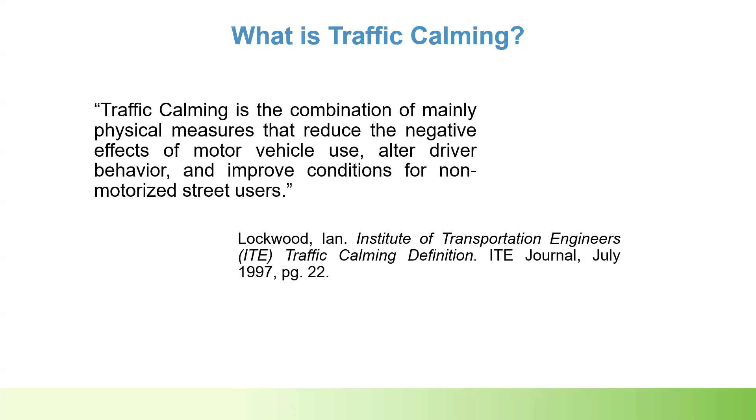So I'll briefly describe each step, but there's also a guidebook available online, and also a very tiny one that was mailed to project members. That will have more detail if you need to review anything after the meeting.

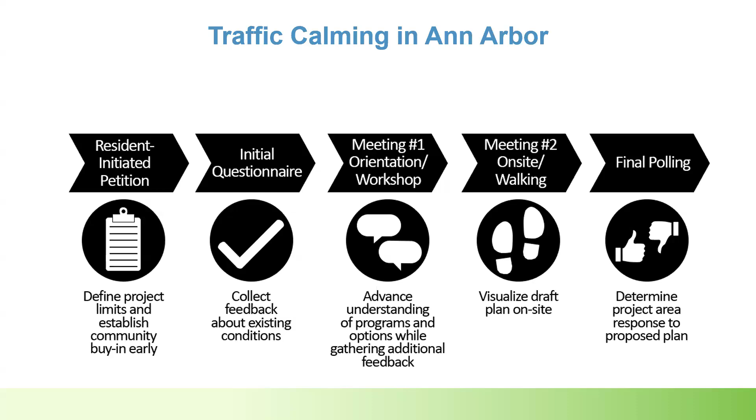So step 1 was the resident-initiated petition. The Carmel Street project started with one of your neighbors acting as the petitioner. They submitted a request to the traffic calming program for Carmel Street between Easy Street and Towner Boulevard. After this project area was defined, the petitioner gathered signatures from other residents who also live within that area. The requirement for the traffic calming program to accept that request is that at least 50% of the defined project area must support the project, and a preliminary technical study must result in at least 10 points. This project area collected signatures from 56% of addresses, and the preliminary study resulted in 16 points. There's a breakdown of those points on our project website.

But this allowed us to move on to step 2, the initial questionnaire. This came in the form of a mailing package. It had the questionnaire, with both an option to fill out and mail in or to complete online through our SurveyMonkey. This was sent to all of the project area residents to gather feedback on your experience with traffic calming, whether positive or negative, any specific concerns you have with the street, and to get a good picture of how the neighborhood currently feels about safety in the area.

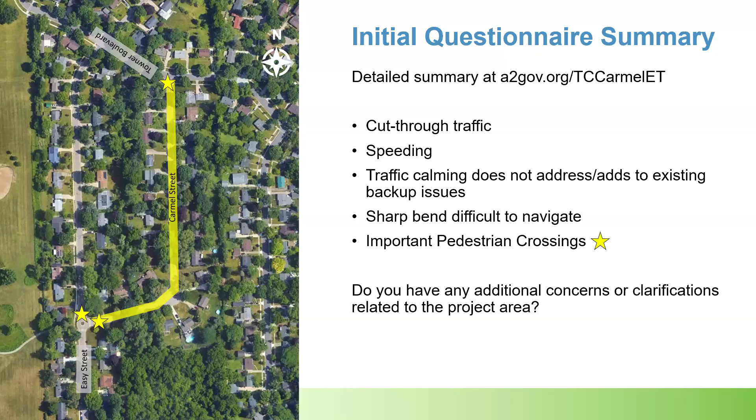So step 3 is where we are today. This is where our focus will be for the rest of the meeting. We have a starter idea that we've created, but before we do that, we'll just run through some of the devices that the program's guidebook allows us to use.

Before that, I'll do another poll, and ask - should pop up in a moment. This is asking if you're already familiar with the guidebook, if you might have gotten a chance to look at it. Take a moment to fill that out.

We're just short of full participation in the voting. I'll wait another moment in case anybody else wanted to do this one. We're kind of all over the place, which is perfectly fine. We've got some people who've already taken a look at it, maybe very briefly or just a while ago. Some people this guidebook is completely new to. That's perfectly fine, because either way, we're still going to go over it.

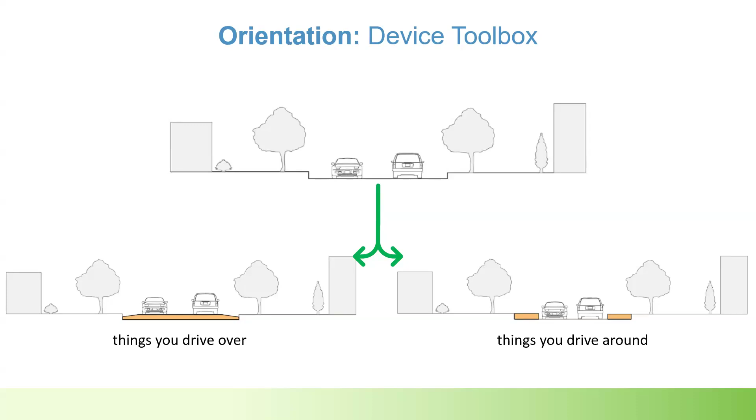So the category of things you drive over, in the guidebook, there are 4 devices. Things you drive over are devices intended to slow traffic by creating discomfort if traveled over at a speed exceeding 25 miles per hour. Again, this project applies to local streets, so the speed limit shouldn't be any greater than 25 miles an hour. So that's what these devices that you drive over are intended for.

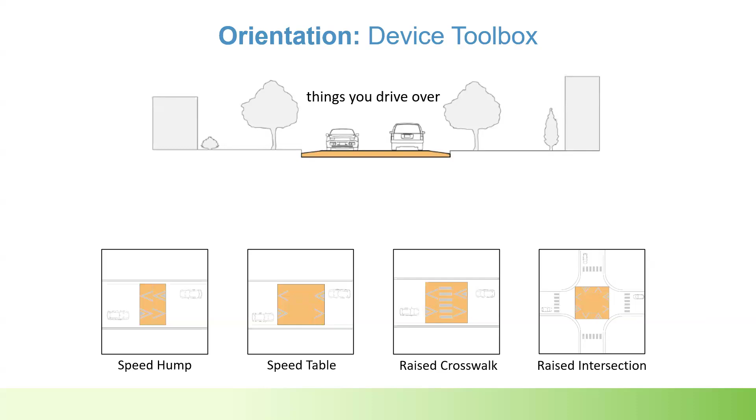We've got speed humps, speed tables, raised crosswalks, raised intersections. Right now, the city has put a pause on the raised crosswalks and raised intersections - both of these devices are under review by the department. Again, with the nature of this program intended to be budgeted for construction a lot faster than other larger projects the city does, they want to make sure there's a standard that can be followed so they don't run into issues with grading or ADA compliance. So they've put a pause on those right now. Doesn't mean they're completely off the table in the future, but for now, in terms of things you drive over, we're just looking at speed humps and speed tables.

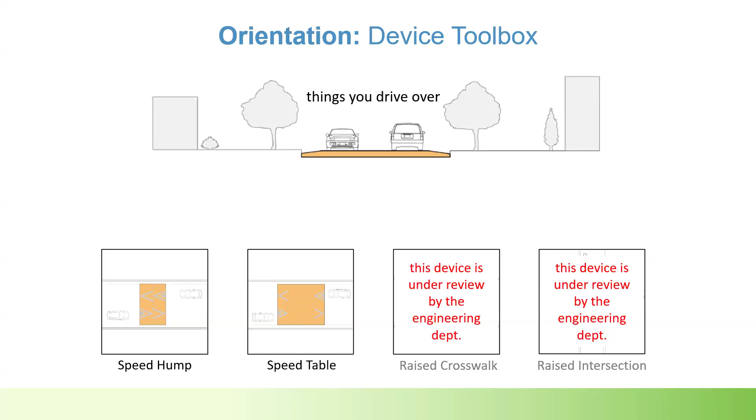Speed humps are typically 12 feet long. They're at their maximum 3 inches high, so they have a parabolic shape, and the maximum is at 3 inches. They extend the full width of the street, except for the gutter. If you look at the diagram on the left, the yellow is the speed hump, and it's just short of the gutter there.

When we look at the effectiveness of speed humps, there are studies that have found benefits may include speed reduction, traffic volume reduction, crash reduction. While we don't design or use traffic calming to deter traffic, volume reduction does end up being an outcome in a small way.

Other things to note regarding speed humps are that maximum height, that 3-inch height, was designed for ease of bike usage and bike safety. So it's still tall enough that a vehicle can feel it, but the design and the height isn't going to be something that should cause any discomfort or safety concern for bikes on the road.

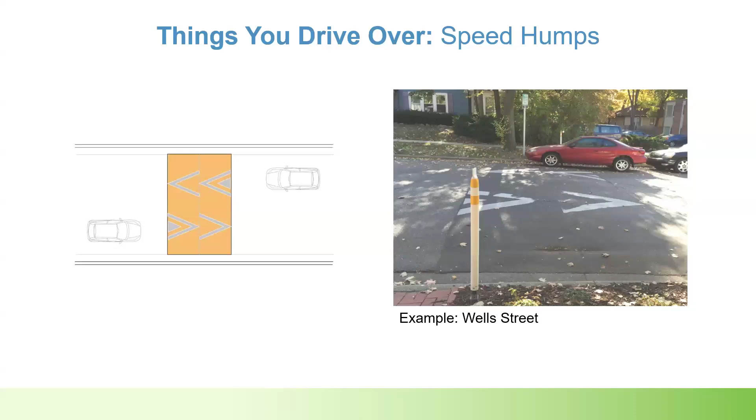There have been studies with speed table treatments. Traffic volume reduction and crash reduction are the most documented results from these. I will say the speed reduction is less than what you could expect with a speed hump. That platform width can be customized, and the same things apply as with the speed hump.

If parking is legal on the street, you can park on a speed table. You can place trash cans on the speed table if necessary. Bike usage and bike safety is in mind with the design, so there shouldn't be major issues with that.

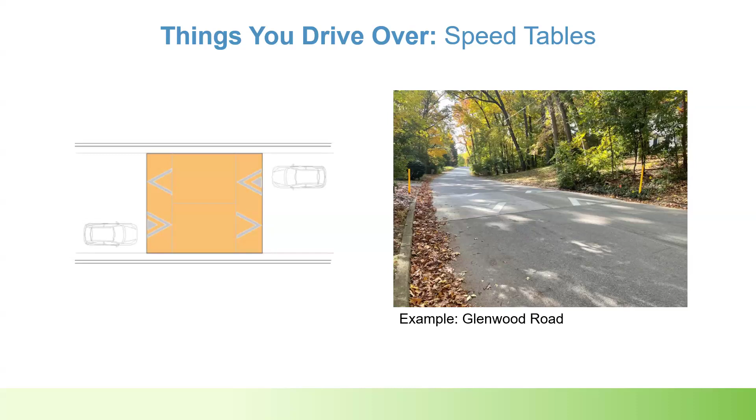So just those two devices are in the category of things you drive over. I'll do another pause if there's any question on the devices, anything you want me to go back on or clarify, I can do that.

I don't see anything, so I'll just keep moving forward.

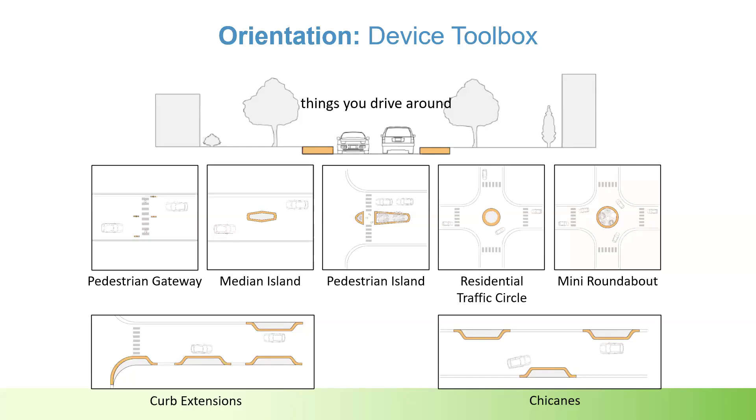The other category, other group of devices in our toolbox, are things you drive around. This type of device slows traffic by creating a perception of less room for error. It either visually or physically tightens the roadway, narrows it, and there are actually 7 devices within the toolbox under this category that the city has approved.

A good chunk of them are not applicable to this project. I will say a lot of these are due to width requirements—so for the fire department or emergency response to have the access they need on local streets, a lot of these devices don't meet the criteria.

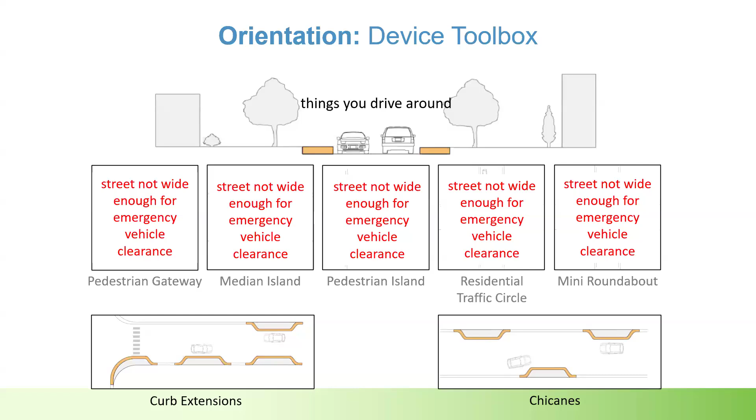So the next few slides are just going to be on the curb extension and how that's used.

Curb extensions can be used in several designs. You can do one at the corner for a bump out, or in the middle of your street as a mid-block bump out. You can put two across from each other, one on each side, and that's called a choker, which narrows the road, essentially a lane reduction.

So curb extensions are extensions of the curb line. They both physically and visually tighten the corridor by narrowing the street width.

The next slide will show a chicane, which is when you do alternating curb bump outs or mid-block bump outs.

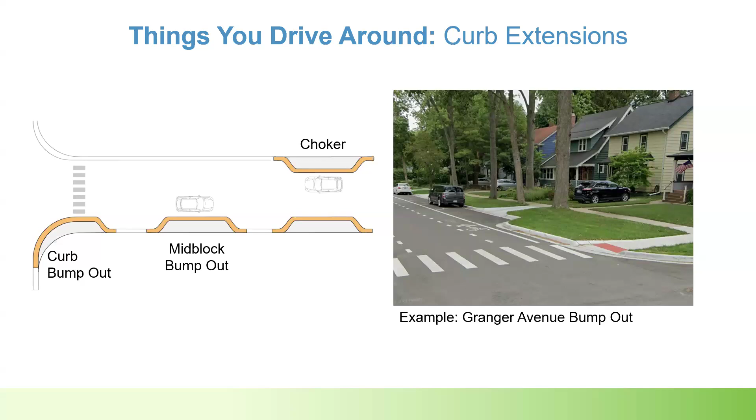This is that additional design with curb extensions where you alternate and stagger them to create a chicane effect. But the same considerations apply: drainage loss, loss of on-street parking, additional maintenance, and minimum width requirements.

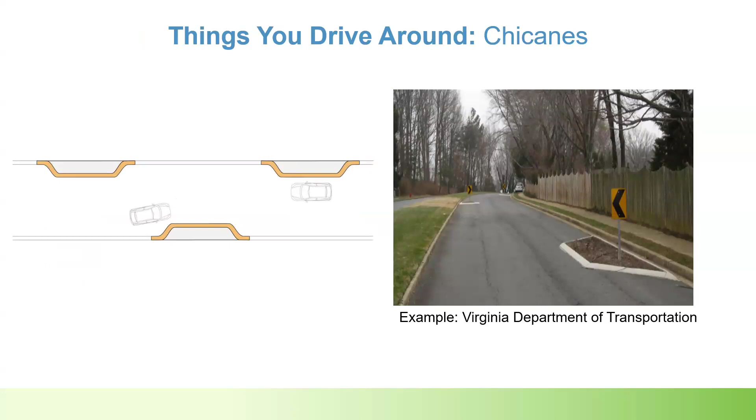Installation of this may require additional right-of-way. Additionally, the program has stated that the neighborhood or adjacent property owners would have to bear costs for landscaping, installation, and maintenance.

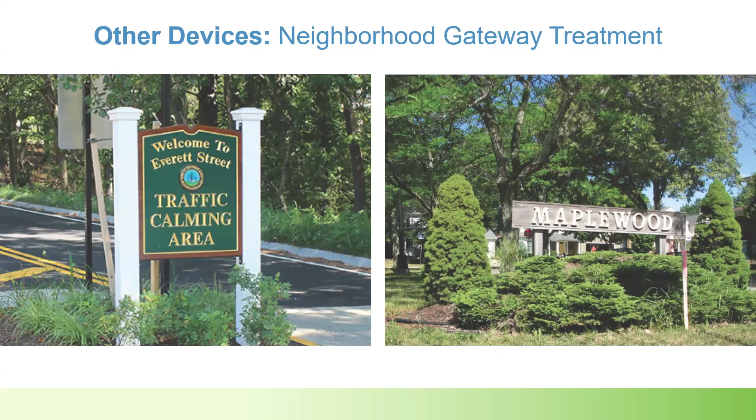So those are our devices. We're basically looking at three different things that we can implement right now that apply to Carmel. One of those, the curb extension, has a couple variations in how they're used.

I try not to go through these too fast, but I do try to get through it because I know a lot of people are here, and a lot of us just want to get into talking about Carmel Street specifically and the starter idea.

So I did get one question come in: what devices are being looked at for Carmel? Are bump outs being considered? I'll show it in a couple slides here, but bump outs did not make sense for our initial starter idea. So they're not off the table, but I can tell you they're not in the starter idea.

The follow-up question was, is there anything being considered for the curve? I'll show that when we get into the starter idea. With the curve specifically, we are restricted a little as to what this project can do, but I'll put a mental note to highlight the curve in a couple slides.

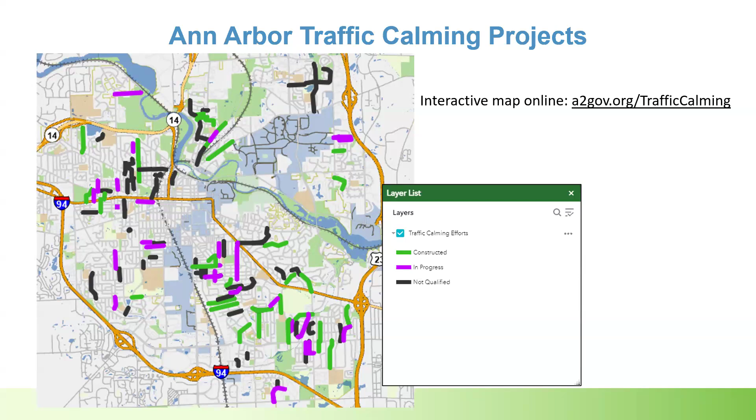So this is our next exercise, our next section where we get into the starter idea. This is a draft plan we've created, based on that preliminary data collection, that preliminary study done in the first step, the feedback from the questionnaire, and the context that the city and the petitioner provided. We'll have plenty of opportunity to answer questions on each of the devices and discuss any changes you may want to see, keeping in mind this project is limited to the devices we just reviewed, and there's additional engineering and design that needs to go into them before they're shared at our next meeting. But this is a starter idea, just our launch pad for conversation. This is not by any means the final design we'll see at the end of the public engagement.

We're proposing 3 speed humps throughout the street. To answer the question that popped up about how many feet apart multiple speed humps can be installed - this may be in the guidebook, but I skipped over it. Speed humps and speed tables are most effective when used in a series. A common comment is that they're not effective because people slow down to go over them but then speed right back up to get to the next one. So spacing plays a big role, and having them in a series assists with that. If we just had one speed hump, it would do nothing. The city has come to a consensus that they like to see them between 250 to 500 feet apart. Anything creeping into the 600 feet separation range would get into an area where you'd have to worry about its efficacy.

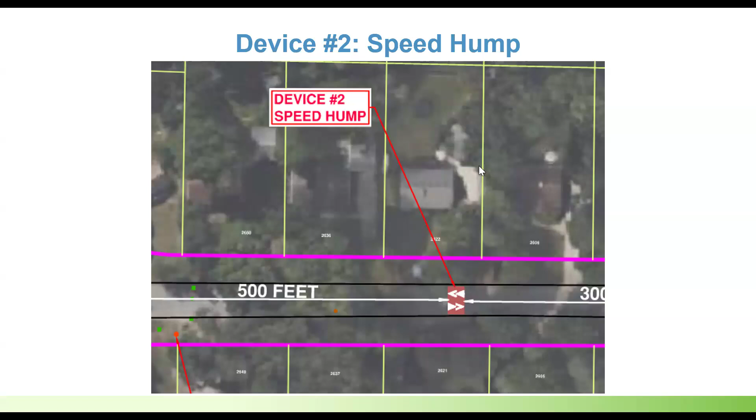Okay, let me go back. So you should be able to see the photos that I added on one of our previous slides. Let me get the little laser pointer thing too. The smaller photo here on the right is Carmel facing Easy Street. The big curve is where we've just gotten past the curve. So you can see that you do have drivers who will venture off the side of the roadway. So it looks like that may be an existing concern, an existing issue already.

This is about the area that we're looking at proposing this speed hump, device number one. So we do see that the yards on both sides are pretty even. I guess I'll still have to leave it at, it's not out of the realm of possibilities for a driver to do that. But I would also think that since we're doing these speed humps in a series, the person is already traveling at the proper speed limit and does not need to swerve to avoid the speed humps, because usually people do that when they're going too fast and haven't slowed down quick enough and are trying to avoid the impact. It also seems like it's an existing issue, but again, it would have to be a consideration, especially for those who would be directly impacted, who are on those property lines.

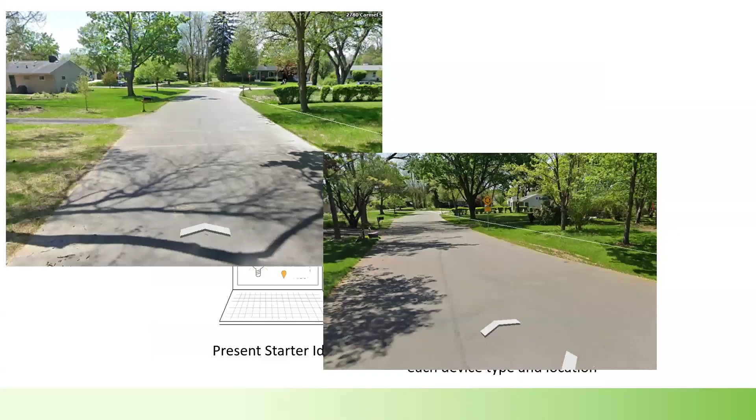Let's go back onto the aerial. So what this comment is saying is a lot of the speeding is coming from this end of the street, going through this curve too fast and ending up in someone's yard or destroying property.

Does anyone know how long this roundabout has been here? It looks fairly new. I can pull it up and check, but if anyone knows offhand, let me know.

This was installed when Easy Street was redone. Yes, I saw that. That's another thing I can add as context. In the initial petition, there was a statement about waiting for repaving, and I know that was addressed over 5 years.

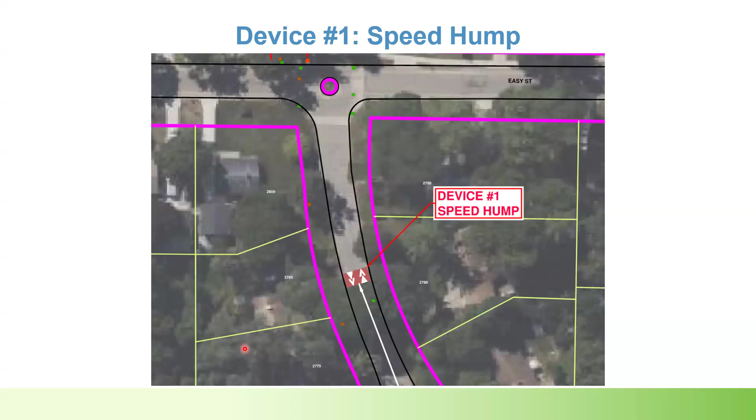But with what we're given now and the curve being our main focus, with our starter idea, the spacing could be moved around if anyone has a specific issue with its placement. We can definitely move things around.

Like I said, the initial look at this curve considered putting some kind of median in, or tightening the curve. But initially it looks like that would not meet the emergency vehicle requirements.

There's very little awareness of the curve now, so speed humps may do more to bring awareness to it and carry drivers through the curve, rather than tightening the curve and potentially creating just a more narrow speedway for drivers to go around there.

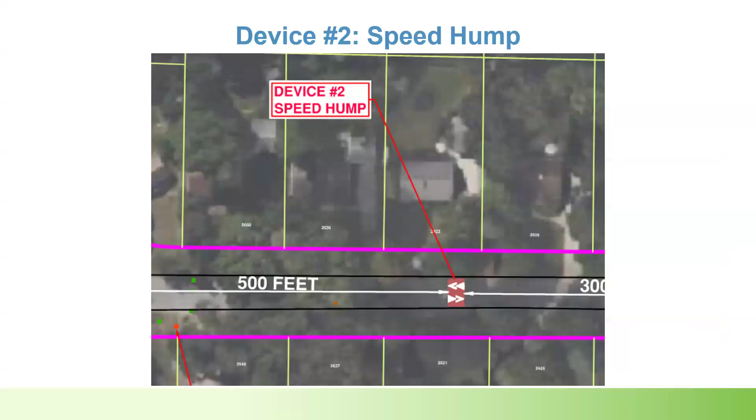I have a couple other slides or polling questions to see how we feel about each of the devices. I don't know if there's any comment or feedback before I start the polling questions, but we still have about 28 minutes left in our meeting time, so we can discuss more, but I'll get the polling out of the way.

So there's a couple of different options for these questions, the format of these questions. There's a yes and no on support, but there's also an option if you are in the project area, or if you're not - addresses that didn't receive the mailing package would be considered outside the project area. But please do vote regardless, if you're in or outside the project area. And if there's more we want to talk about, or more questions, thoughts or feelings on any of these, this is your time to get that out, so we can make sure we're moving in the right direction.

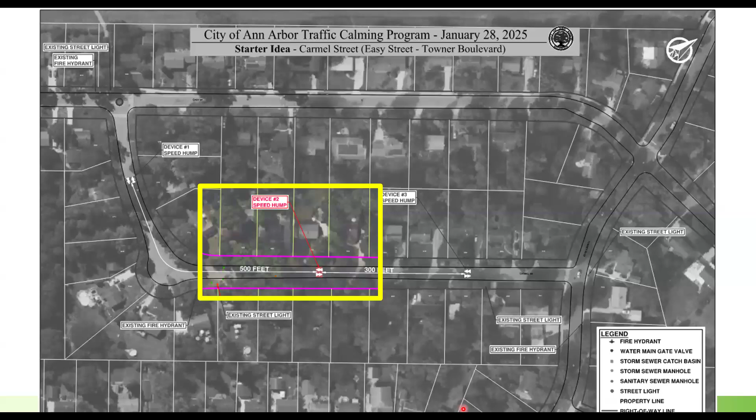Go back - so this is the second speed hump, and the comment that just came in was to add another one between the curve and Towner. Let me measure while some of the voting still comes in, how much room we actually have to work with. Like I said before, we do get restricted by utilities and driveways. So we've got about 750 feet from the intersection here to right about where the edge of this box is.

And I will say with these questions, I know it's very vague - do you support device 2? I would say when you're answering, consider the type of device and the general location. If there's more you want to add, like yes but, or no but, that would be something to add in Q&A, or open up the mic. I will launch another poll after this one.

I got about 60% participation on this poll. I'll finish this poll up in a minute, give anyone a chance to answer, and then I'll launch the one for device 3. I'll also launch an additional poll if we support having another speed hump somewhere, if we want to try and fit 3 speed humps in this stretch.

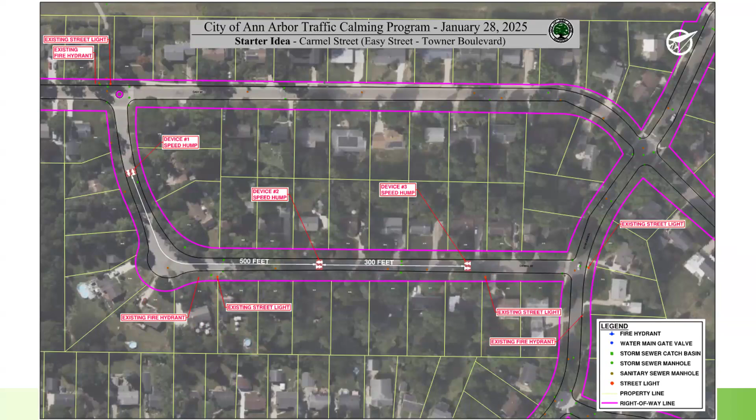So that was all the polling that we had. Let me get back to where we were. So it seems like we're getting some pushback on the speed humps. I don't know if that's just not wanting an agreement on traffic calming in general, or if it was the devices.

I will have my contact information if there's any other context at the end that people think of that want to share. Again, this polling is anonymous, and there's commenting that's anonymous. I don't want to make it seem like it's not a space where we can share disagreements either. But I can look at, for their next meeting, the feasibility of adding a fourth speed hump in that straightaway. But it looks like of who's here now, not everyone's in agreement that they would like to see an additional device.

Curb and gutter start in the approximate area where a fourth hump could be. Okay, we can take a look at that one.

Another comment: have you considered markings directly on the pavement? I know it's hard to see in winter, yet it would be visible in the majority of the year. So the pavement markings are not a part of this program. Only the markings that are required with the device would be on here. But yeah, I don't think the city typically puts markings on their residential streets unless they're for advisory lanes or things like that.

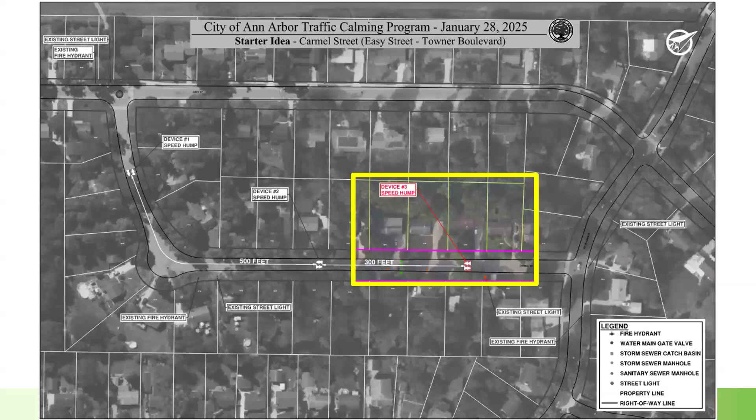Unfortunately, but yeah, I agree, sometimes one of the most efficient and cost-effective ways to find a solution are just pavement markings. But having that tactile thing you drive over is what helps make these effective.

So as we were talking about on-site walking, over the next couple weeks, what we will do is take the feedback, look at feasibility of a fourth device, but it kind of sounds like maybe we'll just keep the starter idea as is. But today's presentation and the recording will be on the project website over the next couple weeks. Also, a summary of the polling and feedback will be posted to the site as well. We will use the feedback to go back and look at the starter idea, clean it up, and create what will be called a preliminary plan.

So ahead of meeting two, which actually has two parts: there's a self-guided tour that is set up sometime ahead of the meeting date, and then that meeting date again will be on Zoom. Our meeting 2 is scheduled for April 9.

For the self-guided tour, you will get a mailing packet at least two weeks ahead of our April 9th meeting. The packet will have device images and descriptions that you'll be able to use to do a self-guided tour prior to our meeting.